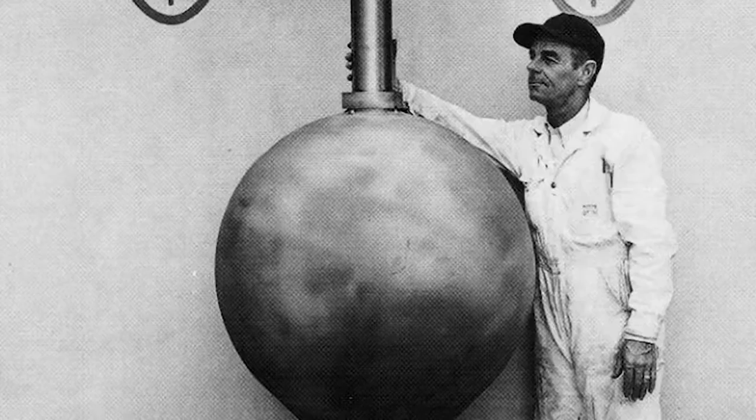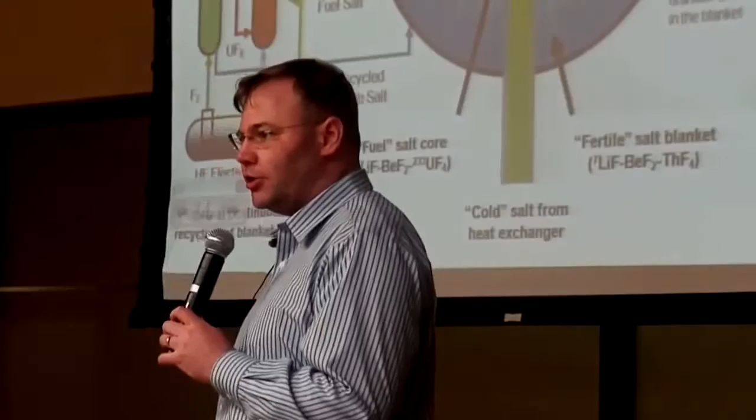You know, the Navy had reactors, and so the Air Force had to have reactors. Very, very radical nuclear reactors, totally different than the kind of stuff we have now, based on the idea that you could take salts and that they would be a really good medium in which to have a nuclear reaction. Well, we were young chemical engineers at the time, and God smiles on young chemical engineers. They do things that in later years would be regarded as crazy.

It wasn't that I'd suddenly become converted to a belief in nuclear airplanes. That the purpose was unattainable, if not foolish, was not so important. A high-temperature reactor could be useful for other purposes, even if it never propelled an airplane.

This is an old facility. Look down before you walk. That's our biggest hazard here right now.

Oh my goodness. Yes, yes. I've modeled this shape neutronically. It is like a lead pencil, isn't it? Yeah, it is. Basically. Right.

We just returned from a trip to Oak Ridge National Laboratories, and one of the exciting things that the Baroness and I got to do was to tour the molten salt reactor experiment, which was one of these types of reactors that was built in the 1960s. It was an experiment that demonstrated many of the key technologies, although there are some that still remain to be demonstrated.

How long have you been here? I've been here since 1992. There are very few people in mid-career in nuclear energy right now because there's a huge trough. We have a large number of students coming back into it.

Well, the context has changed completely, hasn't it? It has. Yeah, when we went into nuclear energy, they said, "What are you, nuts? There's no future in that." And it really didn't matter. We say it's the true believers.

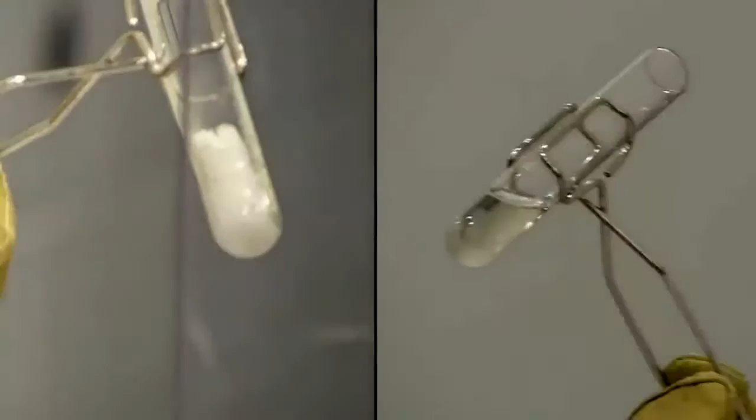Liquid salts are an outstanding heat transfer media. It really doesn't matter what you're going to be transferring heat for, whether this be a solar power tower, whether this be a salt-cooled reactor or a molten salt reactor. Viscosity on it is 30 times larger, but water's very low viscosity, so it's still a very low viscosity fluid. Some people might imagine this is quite a gloopy or kind of slow-moving liquid, but it's actually quite fluid. You're right, it does go through a melt much like a glass as opposed to water, which doesn't quite do that. So we want to run it 100 C or so above this, so it does flow nicely.

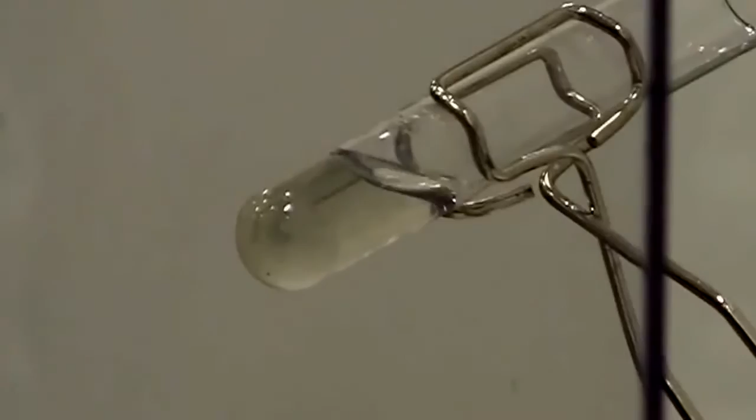If you go ahead and repeat doing things in here, you can see you start to etch the glass just a little bit. So what we have to do in a reactor is keep things very highly reducing. If you put extra beryllium in there, it essentially gives you a preferred spot to rust. And so this is all about controlling the potential corrosion of the salts within any vessel that you put it in.

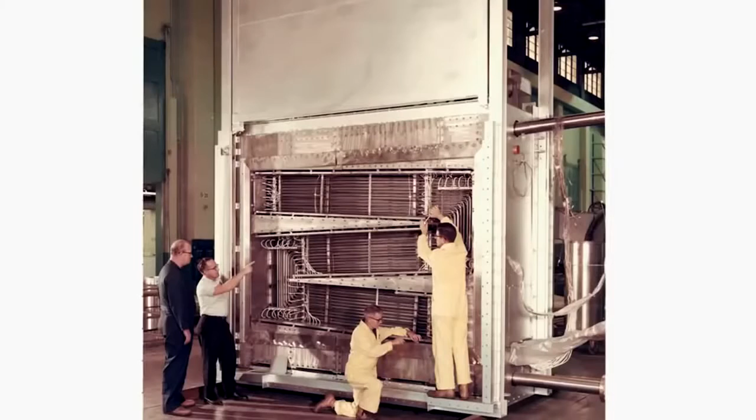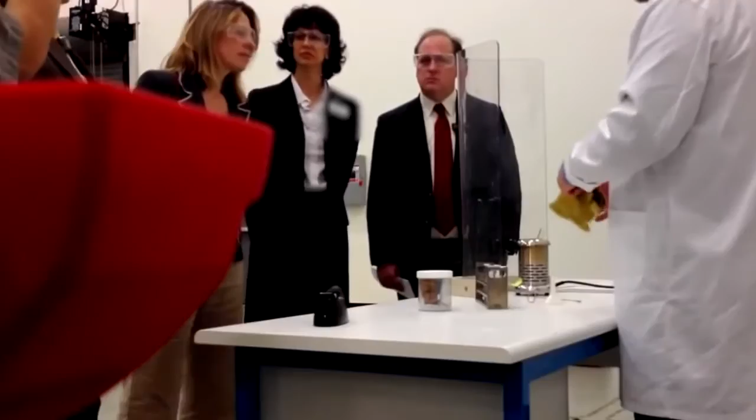The hazard with this is the same as with a deep fat fryer - if I trip, throwing hot oil, or hot salt in this case, on visitors would be considered a bad thing. But there's nothing else to it, it just makes a nice little clear liquid.

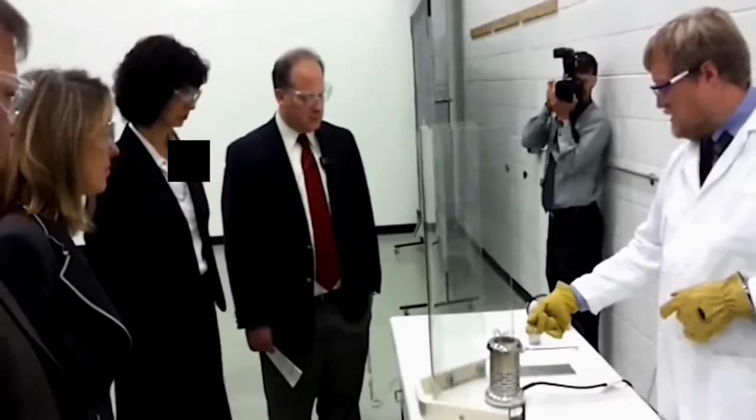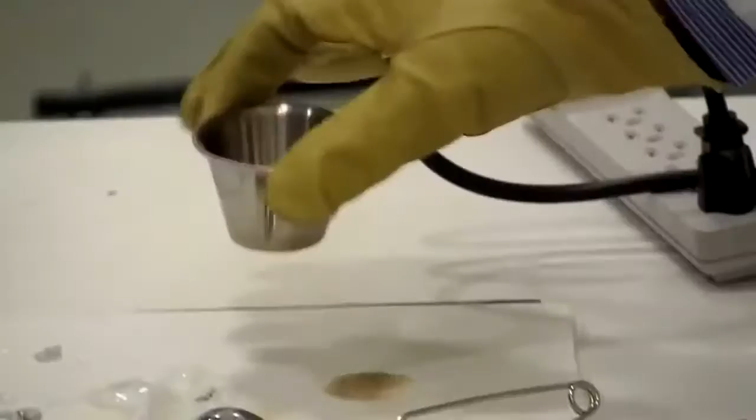I'll just pour this out into a little stainless steel crucible - you could hear that little snap there, that was a bit of moisture at the bottom of the stainless steel. At 450 degrees, this thing is a solid, so it doesn't take very long for it to form the solid again.

Isn't that a nice feature? If you had a little crack on this and it was starting to weep, it forms a plug - self-plugging. That's a nice thing, not being under pressure. On the other hand, if your design keeps the vessel hot, it'll stay liquid. That's why you have a guard vessel - if the absolute worst case happens and you have massive vessel rupture, you still catch it.

The Navy program that led to the light water reactors we have now was well optimized to the needs of the Navy, but it wasn't very well optimized to the needs of power production. The reason we have that as the base for our power reactor technology today is because the Navy was prepared to pay the first mover costs to make one work. Once you've done that, it's extraordinarily difficult to compete with it, because those first mover costs are very, very high and have no financial return associated with them.

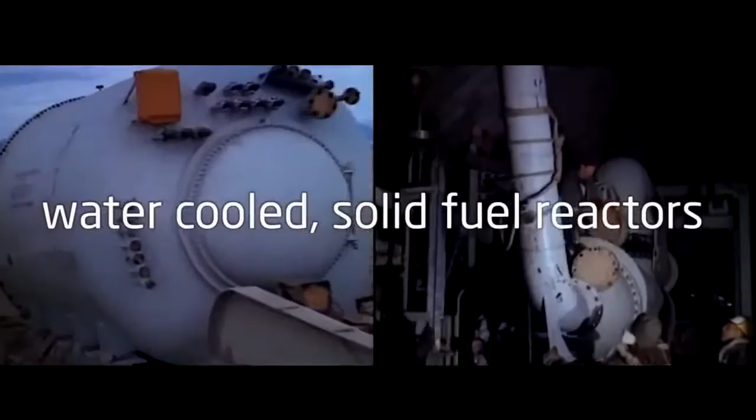The Navy has built their nuclear submarines, and the Army has taken the same technology as the Navy, the water-cooled reactor, and they're doing their thing. But the Air Force wants to build a nuclear-powered bomber. Now, Weinberg was a practical man, and he said a nuclear-powered bomber is probably a really, really, really dumb idea.

The dirty little secret was that most of the people involved in it knew from the get-go that it really wasn't practical. In contrast to a submarine, where you've got limited space but can shield it for the people on board, it's much harder on an airplane because of the weight. Most of us did not really think the aircraft reactor could really work, but we did feel there was a very interesting technology there that someday could be applied. And I would maintain that Weinberg was absolutely right in his assessment of the situation back then.

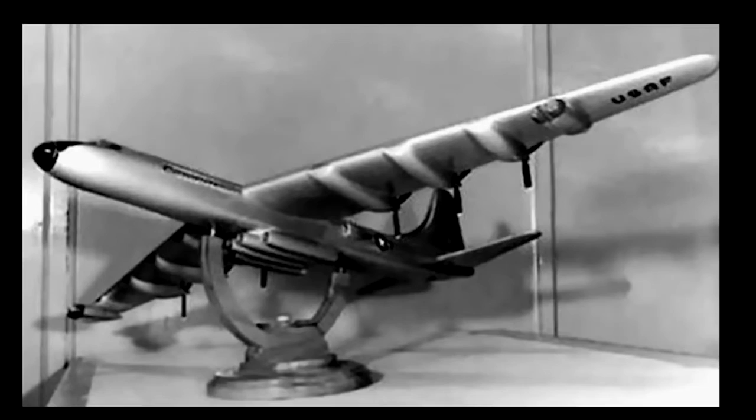He knew that to make the nuclear airplane work, they couldn't use water-cooled reactors. They couldn't use high-pressure reactors. They couldn't use complicated solid-fuel reactors. They had to have something that was so slick, so safe, so simple, that operated at low pressure, high temperatures, had all the features you wanted in it. They didn't even know what it was.

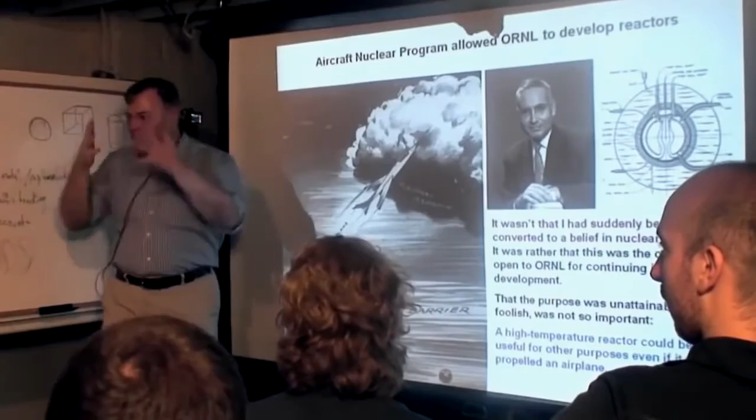I think someday this will be looked at as one of the great pivot points of history - that if this nuclear airplane program had not been established, the molten salt reactor would have never been invented, because it is simply too radical, too different, too completely out of the ball field of everything else for it to be arrived at through an evolutionary development. It had to be forced into existence by requirements that were so difficult to achieve.

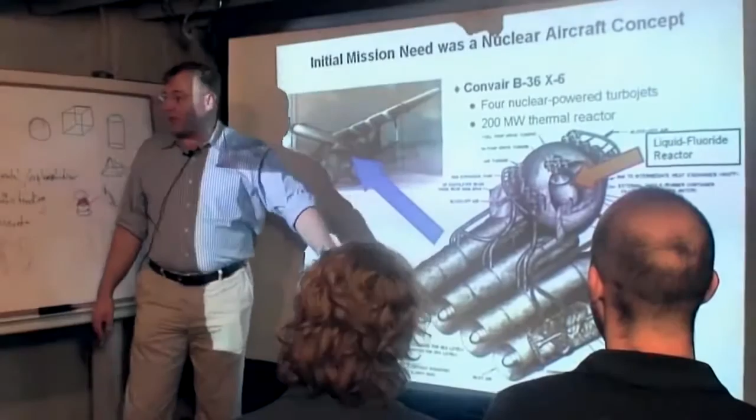And the nuclear airplane was that. So they began working on this high-temperature reactor. Remember, this was invented before we had ICBMs or anything like this - this was a doomsday weapon. I mean, if you're flying this thing to Russia, it's the end of the world.

I suppose you'd have to say it was a miracle that the homogeneous reactors operated at all, rather than that they operated well. Chemical stability of the system was not really sufficient - it was chemically unstable. The second reactor actually operated very well. That was the molten salt reactor experiment.

There it is. This is the place. These things right over here are the spent probes. Those things would extend to like 60 feet in length. They went down the tank, did the melting, did this bubbling and stirring and everything.

A lot of them started above the high bay. When you say high bay - it's taller and we can put cranes in because we can lift things up. You had to go down an additional 25 to get to the top of the tanks, then you had to go inside the tanks.

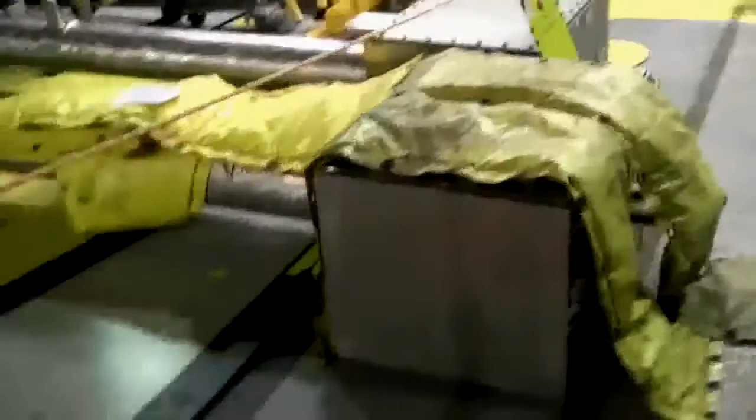So those things would extend. You got a pipe within a pipe. The box is the top part of the probe. We had the controls, we could tell exactly how far down the probe was moving and the weight of it. The probe had heaters on the end of it, and it would melt a pool in that salt and sink down in it.

All those long-handled tools they had for operations, it was almost heroic actions when they were trying to do things. You've got this length of distance, and we'd certainly try to design things today that could be robotically handled. It just would not be designed the same way as it was at that point.

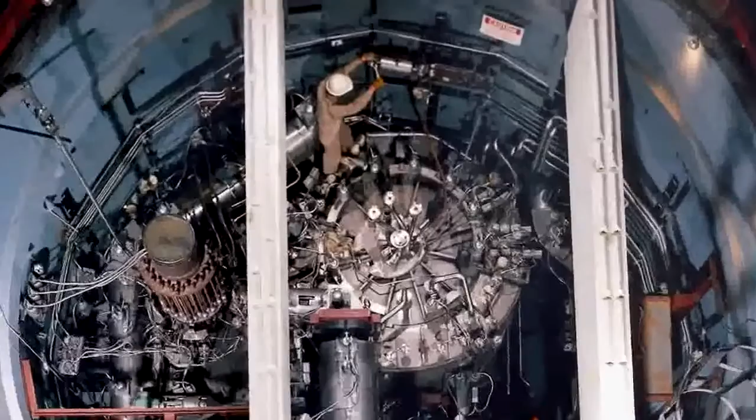One of the things I've learned from talking to some of the old timers at Oak Ridge, these guys are in their 80s now, if they're even alive, is that people didn't disbelieve that we could build the machine. They didn't believe that we could maintain it.

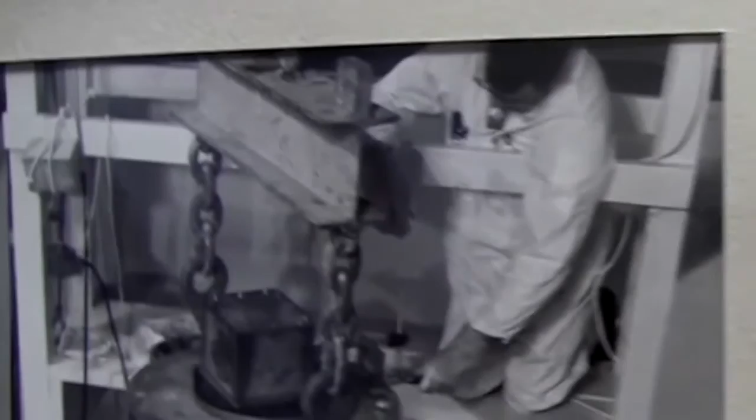Operation of the MSRE was not too difficult, and the people that I had working for me, they all had hound dogs under the porch, old cars out in the yard that didn't run very well. If anything came up with the molten salt reactor, they'd say, hey, we'll fix that. How you gonna do it? I don't know, but we'll fix it.

And they did. One time, the sample capsule was down in the pump. The flexible steel cable got tangled up, it got bad news—here's the end of that cable cut off. So I said, what are we going to do?

And there's the good old boys for you—they said, isn't there such a thing as fiber optics? There's the capsule, and they fished that capsule out. We were back in business.

And they had a lot of long-handled tools, remote cameras. It was challenging, but despite the challenge of operating in high radiation fields, they were able to operate and maintain that machine over the course of its lifetime.

We worked for several years on an experiment that proved that you can handle this molten salt reliably, and when things go wrong, we were able to fix them. The advantages outweigh the difficulties, and the concept is ultimately going to be a practical application.

We still have a few folks who are even operators here who are around. Syd Ball's office is just literally three over from me. He was at the controls when it reached its highest power there. He told me that was an accident. It sure was. Yeah, there's another way to tell that story too.

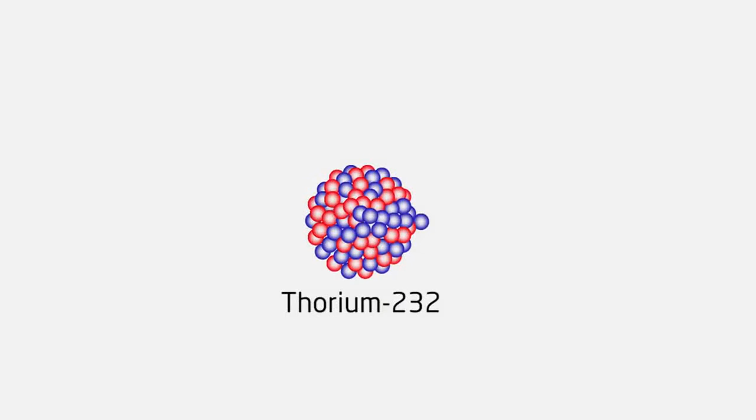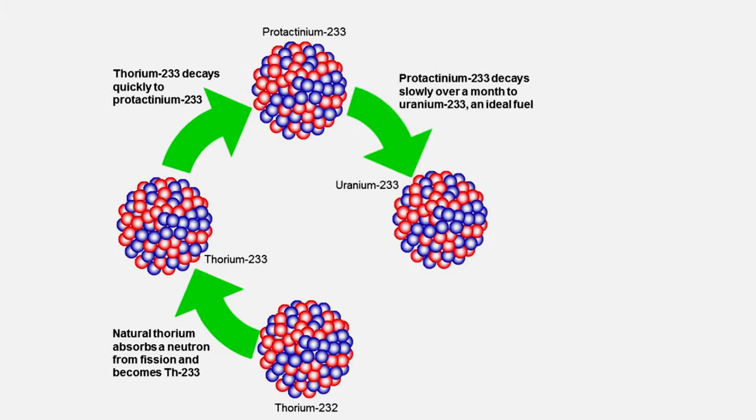The basic idea is thorium all by itself is not going to release nuclear energy. But if you hit thorium with a neutron, the thorium will absorb the neutron and it will turn from thorium-232 into thorium-233. It's going to decay into protactinium-233, and then it will decay over about a month to uranium-233. Uranium-233, if you hit it with a neutron, it will fission. In addition to releasing all that energy, it will release 2 or 3 additional neutrons.

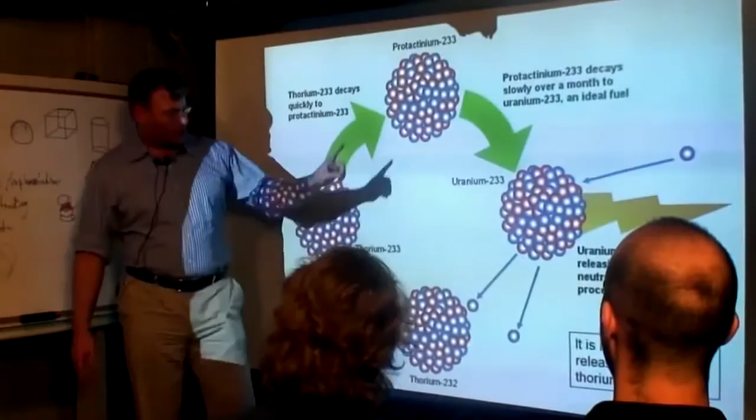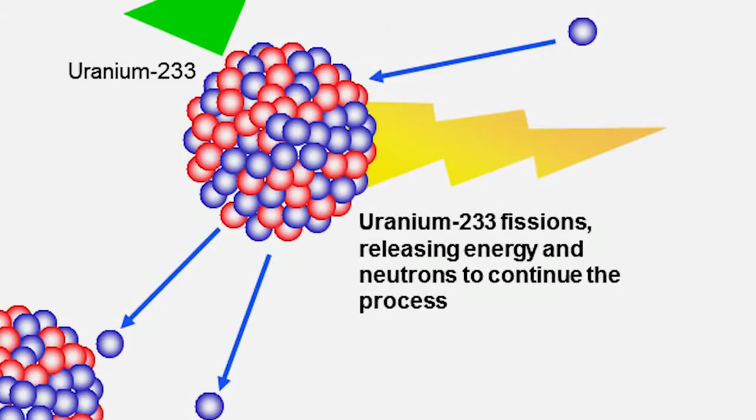So you need one of those neutrons to go find another thorium, and you need another one of those neutrons to find another uranium-233 to continue the reaction. You're fissioning uranium-233, but you're making a new one. You can almost think about it as a pseudo-catalyst. If you had some uranium-233, you could catalyze the burning of thorium indefinitely.

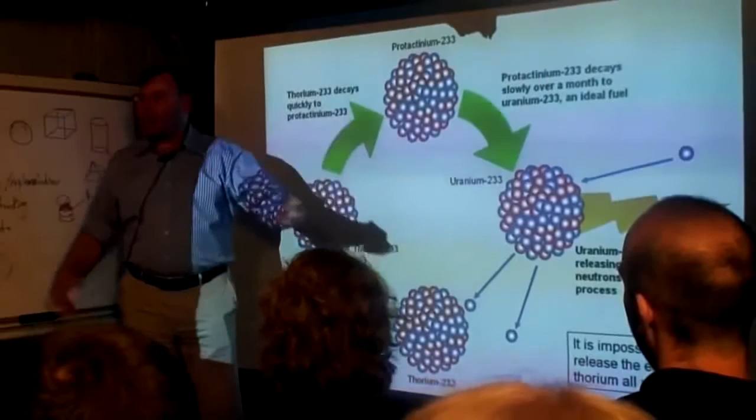So through this process, you can essentially implement that very simple thorium cycle, and this is what Weinberg and his team were working on in the 1960s. The molten salt reactor experiment was the core.

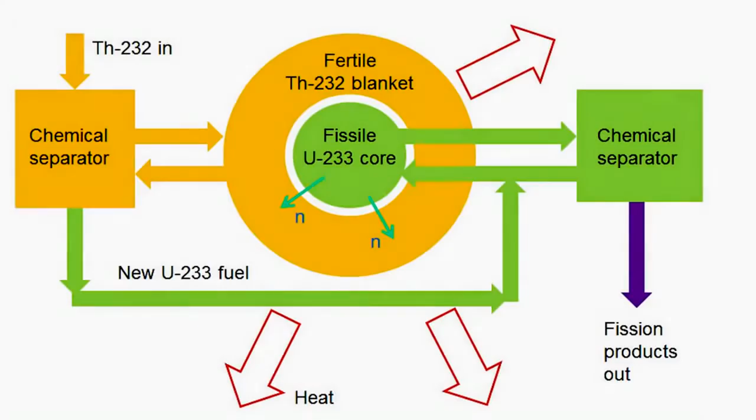After they completed the molten salt reactor experiment, they went to the Atomic Energy Commission. They said, hey, can we have some more money? We'd like to go now and build the real thing. We'd like to build the blanket, and we'd like to hook a power conversion system on and make electricity. They felt like they'd shot the moon.

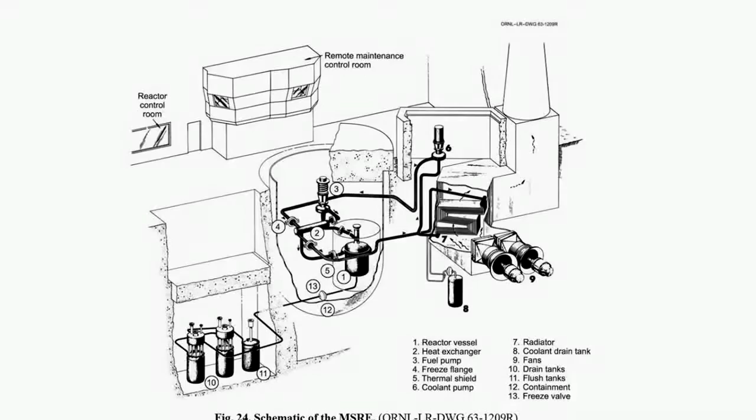Well, the Atomic Energy Commission, unfortunately, did not share their zeal to continue with the technology. Milton Shaw, who was the head of reactor development in Washington, called up Alvin Weinberg and said, stop that MSRE reactor experiment, fire everybody, tell them to clear out their desk and go home, and send me the money for fast breeders. Milton Shaw was sold on the sodium-cooled fast breeder reactors, and I am not familiar with why that was.

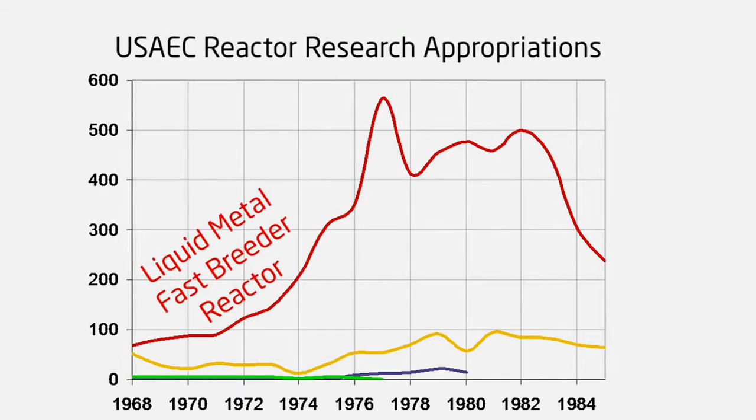The red line shows the expenditures on the liquid metal fast breeder reactor. This graph only begins in 1968. At that point, the United States had already built several liquid metal fast breeder reactors. It's very hard to see the green line for the molten salt reactor technology. It's extremely low. And then ultimately it was canceled.

We were competing with the fast breeder people at Argonne mainly. They just had more political sway than the molten salt reactor.

The problem with the MSRs is that they've never done it. They had one at Oak Ridge for a little while. Yeah, they went through and did a couple of little tests.

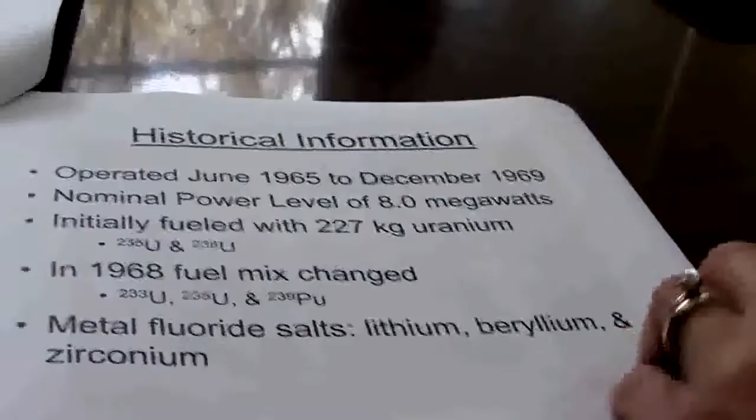We realized that we were minor league money-wise compared to the other programs. U-233 was tested here, and there was a little bit of U-235 in it, and they added some plutonium-239 in that fuel mix. Do you know how much plutonium was added? Oh, about 600-700 grams. They thought the U-233 was the utopia of uranium fuel.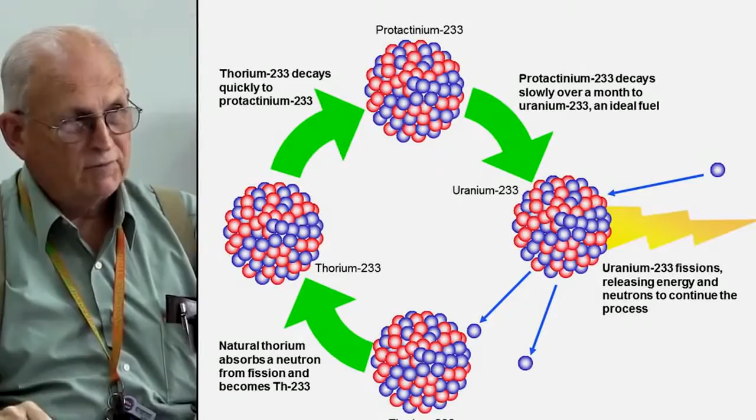Do you feel like the program had a sound technical basis, or do you feel like technical problems were the basis for cancellation? Some of the technical reasoning I heard for the cancellation was that there was a corrosion problem. Tritium was raised as another issue. We made no effort on MSRE to do anything with tritium, and there was a perception that managing tritium was going to be a very difficult, if not insurmountable, issue.

This is the WASH 1222 report from the AEC. Did the people on the program feel like tritium was an insurmountable problem? We recognized that tritium would have to be captured and sequestered for the system to be viable, but most people thought that's something we should be able to do.

Did the people on the program, particularly the chemists or material scientists, feel that corrosion was an insurmountable problem? No. In some of the subsequent work, after that initial shutdown, they did experimental work that seemed to bode very favorably for an ability to solve that issue—as well as the tritium issue, because we did tritium experiments in the 1974 to 76 period, and those are documented.

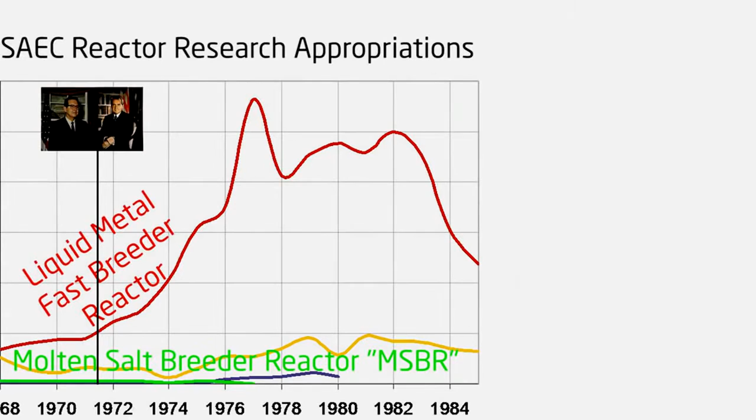You do that? Nixon was from California, Hosmer was from Southern California. Chet Holifield, who ran the Joint Committee on Atomic Energy, was also from California. It doesn't lead me to believe that the president was seriously considering alternatives to the fast breeder reactor and other paths that could be taken.

It was a focus on what can we do right now to get jobs. The United States is going to go forward in building a breeder reactor.

Now, don't ask me what a breeder reactor is. All of this business about breeder reactors and nuclear energy and the stuff is over my head. That was one of my poorest subjects, science, and I got through it, but I had to work too hard.

I gave it up when I was about a sophomore. Nixon, by his own admission, was not particularly well versed in the different types of breeder reactors. Unless you're one of those PhDs, you won't understand it either.

But what I do know is this, that here we have the potentiality of a whole new breakthrough in the development of power for peace.

Maybe it might have benefited our country a little more if Nixon had been able to ascertain the different values of different types of breeder reactors and why one might have an advantage over another. Representative Craig Hosmer, who was the fellow on the phone call we heard earlier, said that if cost targets were missed, 'I, for one, don't intend to scream and holler about it.' So it's not hard to see that they could see great economic benefits accruing to their area of the country.

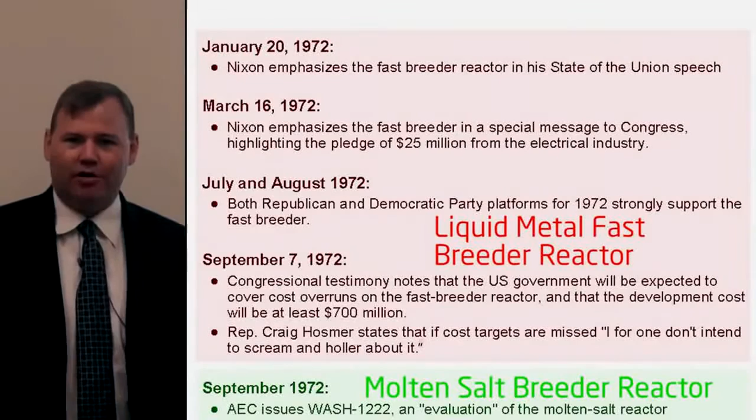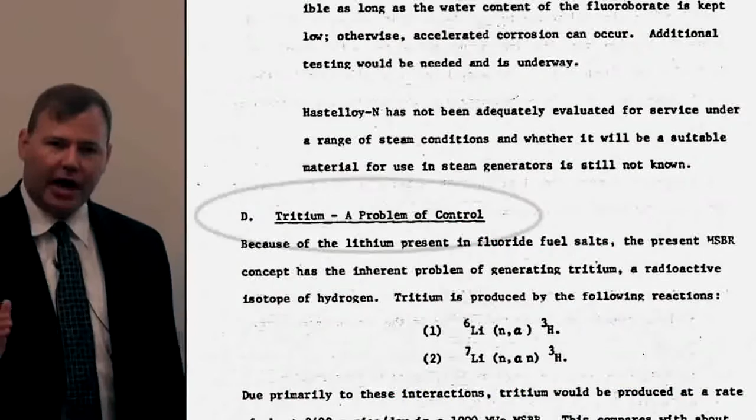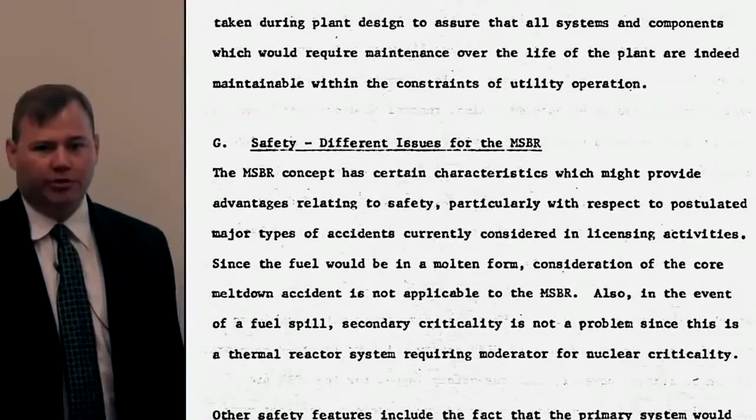In that same month, the Atomic Energy Commission issued WASH 1222, an evaluation of Weinberg's molten salt reactor. It was highly critical of several technological issues encountered during the development of that idea. More importantly, it almost completely ignored the safety and economic improvements possible through the use of the molten salt reactor technology. This was the main focus of Oak Ridge for decades, and it was very abruptly cut off—a very bitter pill to swallow for them. So a lot of these great minds thought their life's work had kind of gone to waste.

The original shutdown came early in 1973 with a letter from Mr. Shaw that says, 'Thou shalt stop right now.' One anecdote I heard: he said, put your hand on your desk, take everything that has to do with molten salt, sweep it off, and you're finished. I saved all my documents.

So you had this geographically isolated place with a huge body of concentrated molten salt knowledge that never got out. We had a corpus of people in Oak Ridge who knew how to do this in the mid-1970s. They're literally dead and gone now.

People that worked on the molten salt reactor would come back and then get shut back down. A lot of people got burned out from that pattern. I've met a handful of them. They're in their 80s. They're not going to do this anymore.

What's happened to Paul Haubenreich and Beecher Briggs and those guys? Have you kept track of them, do you know? Well, Beecher's been dead for a long time. How about Paul? I have not had any contact with him, so I don't know. Quite a few of them are dead now. Well, that's true too, yeah.

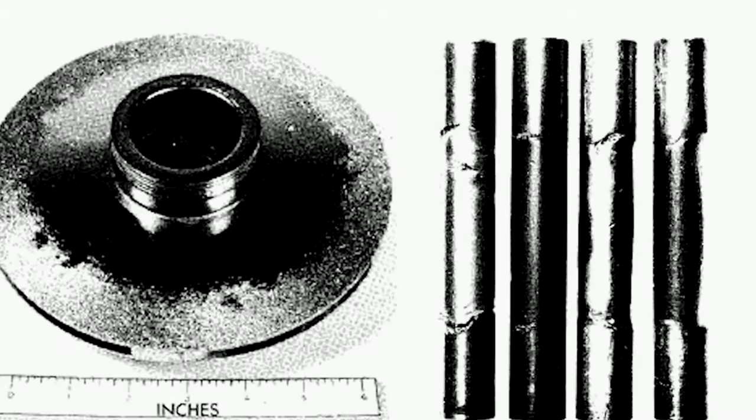He said it probably set us back a decade on some of our ability to roll out quick changes to our recipes. Oak Ridge made a lot of these salt loops—basically little circular loops of plumbing pipe where they would circulate this hot molten salt to see if it corroded the piping. And then they would run these things for 20 and more thousand hours of operation. They were valuable artifacts of the molten salt age.

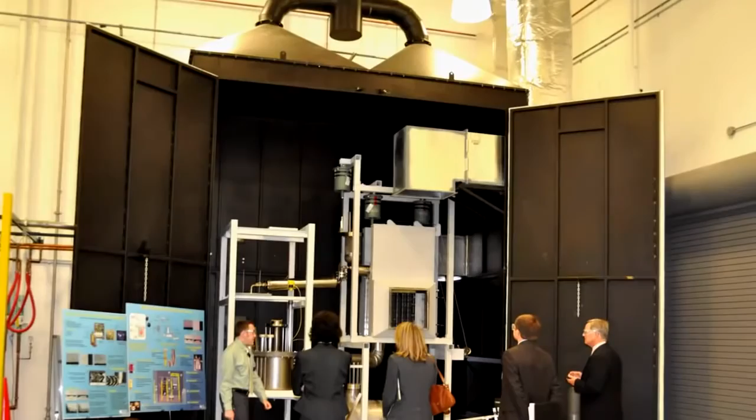Well, Oak Ridge was throwing them away, and Uri Gat was like, no, we need these if and when we restart molten salt. We are trying to demonstrate some of the core technologies you have to make liquid salts a standard heat transfer material. The idea of this loop is to retain our expertise in using high temperature salts, to provide a platform for us to test different components, different reactor concepts.

Above about 600 C, it becomes technologically very difficult to transfer heat effectively. The loop is designed to run at 700 Celsius, that's about 1300 degrees Fahrenheit, and the whole loop is made out of Inconel 600.

Ideally for salts, you'd use an alloy like Hastelloy-N. Right now you can't really get the right components in the right shapes using Hastelloy-N, so we use Inconel 600. It's maybe not the best option, but it's the economical and available one.

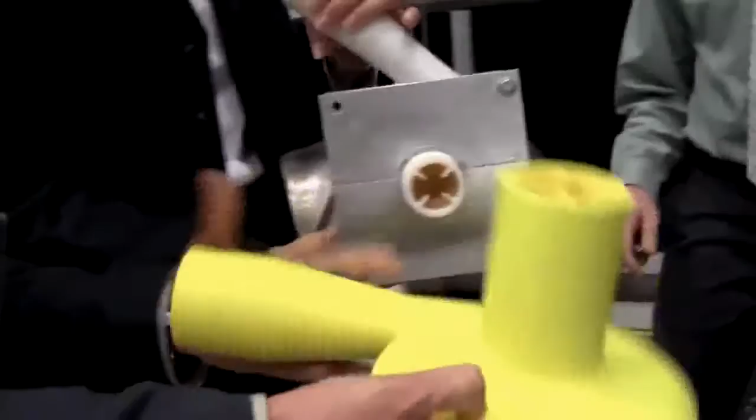It's a way to control liquid flow without using a valve. In normal operation, it comes in this side and out this side, and that creates a lot of resistance - it spins around and comes out. During an accident, the flow reverses and goes this way, and there's not a lot of resistance going from here, just flowing out, because it doesn't spin around.

Then there's a heat exchanger - that's another part of the test. Is all the heat localized on the pipes, or do you heat the whole box? All the heating is in the pipes, either inside the pipes or on the outside of them. It's trace heated - you can see coils of heating tape. All the pipes will be insulated with about 4 inches of insulation.

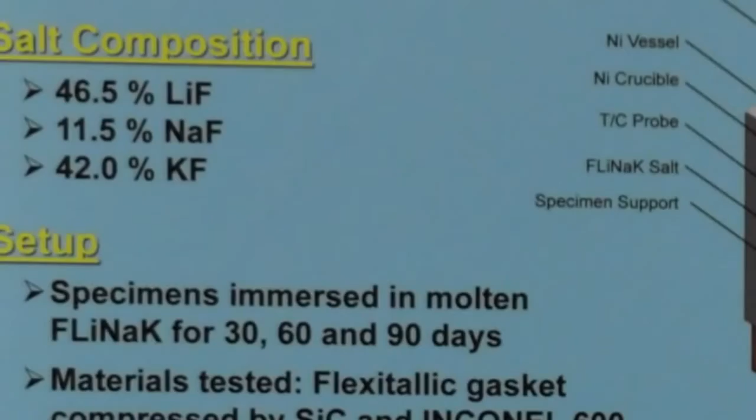There'll be a crucible here. That's where we'll initially load the salt, pass hydrogen fluoride and hydrogen through it, and that will clean out the oxides and different contaminants inside the salt. Once the salt's clean, we'll pump it into the storage tank, where the salt is allowed to freeze inside of it. That's an issue with salts - you can't have it just freezing inside of pipes, because it expands and breaks.

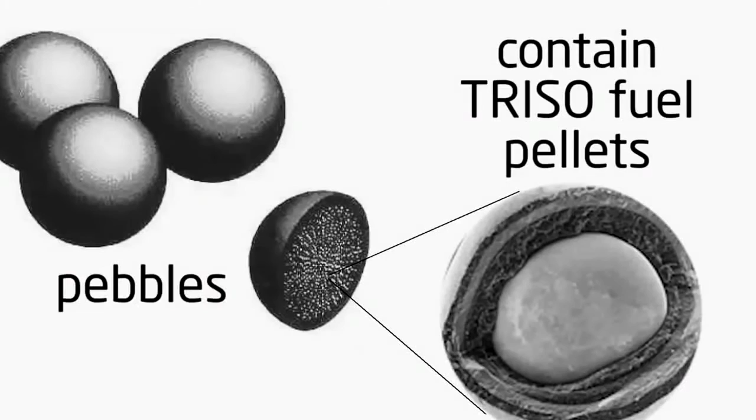The idea is we're testing a reactor concept where the fuel would be inside these pebbles. We'll fill it up about this much - 600 spheres will be inside of it - and that's where the fission and the heat's created, with flowing FLiBe over it.

Can I ask what the theory was around using a solid fuel pebble in the FLiBe rather than dissolving the actinide into the salts? Currently in this country, we're not really looking at molten salt fueled systems.

Using a molten salt as a so-called working fluid, it's doing the job of transferring heat from one place to another. Molten salts have what's called a heat capacity - the ability to hold on to heat. They're great at it. In the example of your car, you want to move the heat away from your engine as efficiently as possible and then just disperse that heat.

The boiling point of water is only 100 Celsius - 212 Fahrenheit. Don't ever open your radiator. Why? Because it's under enormous pressure.

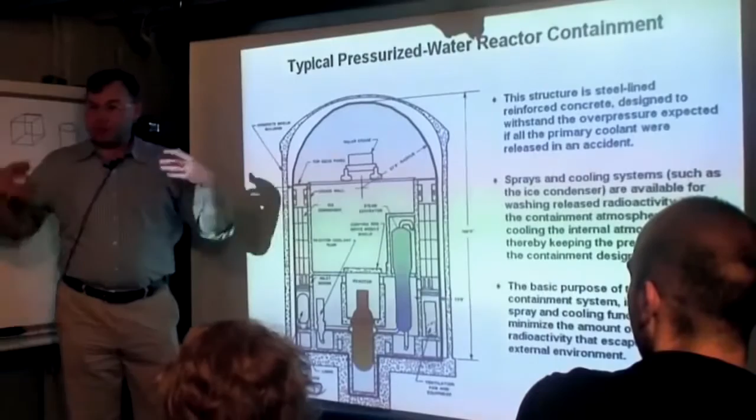This building is the size it is, and it's the way it is, precisely to accommodate this event. They've designed this reactor so if this happens, all the steam is captured in this building and doesn't get out. It's much, much bigger than the reactor, and that's all driven by that 1,000 to 1 difference in density between steam and liquid water.

The boiling point of a molten salt, however, could be 1,000 Fahrenheit, could be 1,500 Fahrenheit, depending on the type of molten salt. They do it at 1 atmosphere of pressure.

Revisiting the potential coolants, water is the one most commonly used. It operates at relatively low temperatures and very high pressures - that's exactly what we don't want. We want to operate at low pressures and high temperatures in order to achieve high thermal efficiency. Gas can operate at high temperatures, but it has to go to high pressure. Only the salts appear to offer the potential to go to high temperatures at low pressures, and that's a unique combination.

Using a molten salt as a working fluid to move heat around is excellent, because in that case you want as much of that heat as possible. Now, fluoride salts can also contain nuclear fuels like thorium and uranium, and that eliminates a major cost of what we do today in nuclear, which is fabricating nuclear fuels.

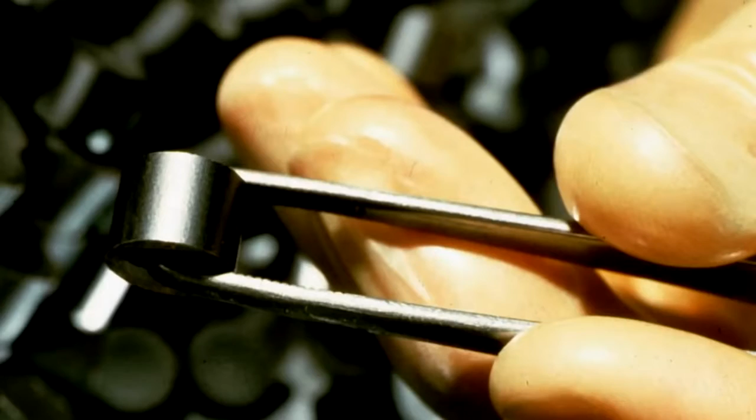Let me talk about today's nuclear fuel. They take these fuel pellets and slide them down these zirconium tubes, segregating the pellets along the length of the fuel assembly according to enrichment. They'll put the most enriched ones in the middle, and then decrease the enrichment along the length of the fuel assemblies.

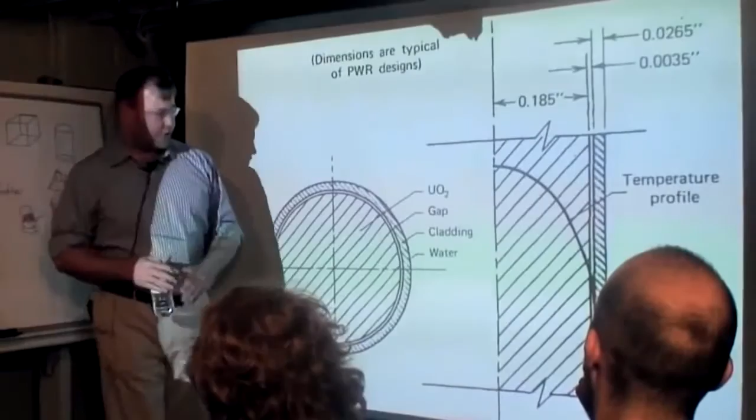It's a ceramic, a lot like the stuff your coffee cups or cooking ware is made out of. Great at going to high temperature, but not thermally conductive, so it gets very hot along the center line of the fuel. This stuff has about the cross-section of a pencil, but between the center and the edge there will be like 1,000 degrees of temperature difference. That puts enormous thermal stress on the material itself.

You can't even come close to 100% burn, not even approaching it. If it gets too damaged, it's going to breach the cladding and let some of its fission products out, so you get very, very poor fuel utilization. If you remember when you went camping and built a fire, it burns hottest in the middle, and the stuff on the edge isn't getting burned very good.

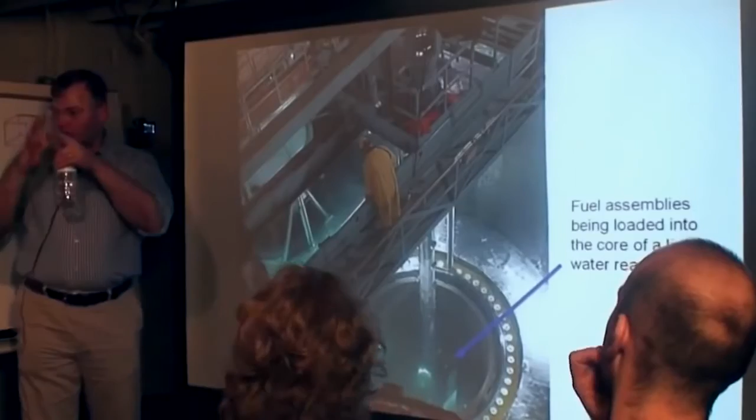They'll load in about a third new fresh fuel, and then they'll reshuffle the fuel that's already been in there, moving it from the center out to the periphery. All their money now is coming off fuel supply contracts. That's how GE and Westinghouse make money on nuclear power today. They don't build reactors, they sell fuel.

There must be some advantages to doing the solid fuel. If you want to use the salt as a coolant, it's just much, much easier to do something that's non-radioactive on this. That's why we have the walk before you fly approach.

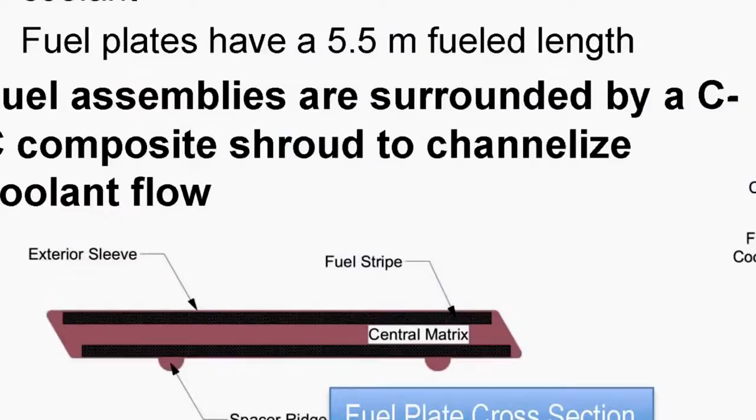The U.S. is electing to go after a salt-cooled reactor at first. Our method of rejecting heat is into the coolant. What we have are planks, about 25 millimeters thick. You can put whatever kind of test you can imagine in this area. We could put a solid plated fuel in. That test section can be replaced and others can be put in.

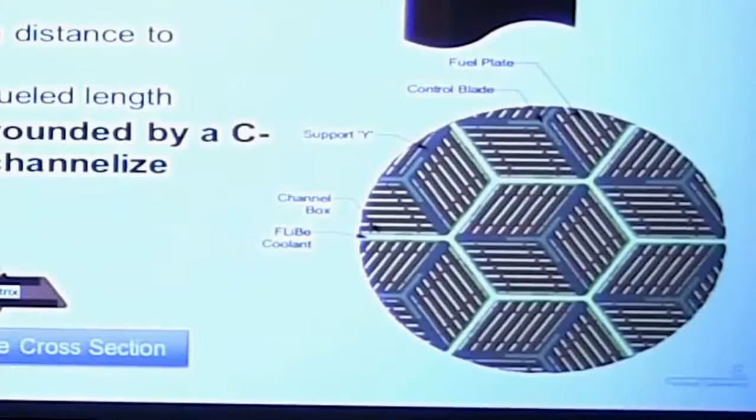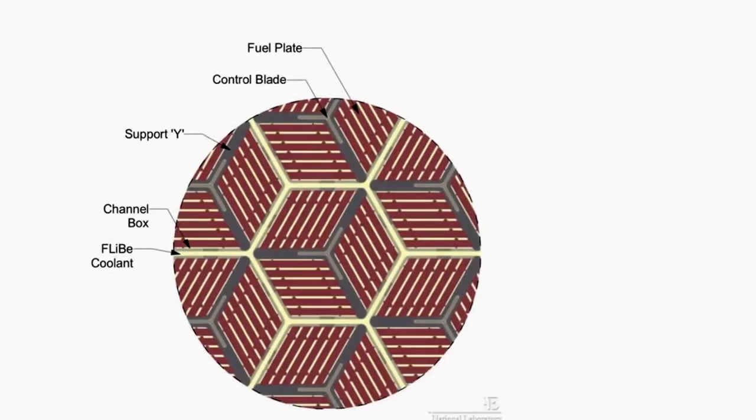So if you're looking down from the top, there are 18 fuel assemblies arranged in a hexagonal grid. In a solid system, you can't get into the bulk of the solid fuel. In a liquid system, you effectively have infinite surface area.

It is not to say that the U.S. doesn't recognize that molten salt reactors have some very interesting, advantageous capabilities, but they are a more technically challenging thing to do. What is easier? Running a liquid past a solid in order to transfer the heat, or having the fuel be a liquid and use that in and of itself? So I would argue that actually combining the two is easier.

Sure, it's more chemistry, but so what? I'm a chemist. There are lots and lots of chemists on the planet, and a lot of them are a hell of a lot smarter than I am. So, go solve the problem.

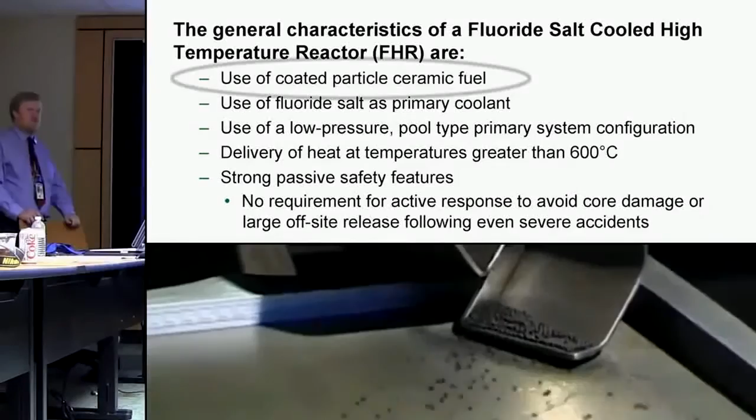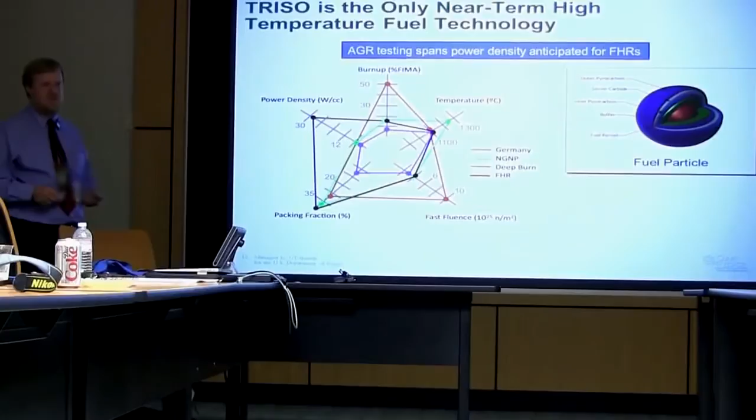It uses a fluoride salt as a primary coolant. It uses coated particle ceramic fuel, that's the TRISO fuel. This is the TRISO. Essentially these are small kernels, smaller than a millimeter. We've got the fuel in the middle, and a multi-layer structure, the important thing being the silicon carbide in here, which is actually a gas-tight containment. Silicon carbide, even though we're using that as part of the design...

That's part of the test. We're going to find out how that performs in a salt environment now. We'll be doing natural circulation, safety testing, corrosion specimens in here in a pumped loop. I figure the next decade we will continue to use this as a base for our system.

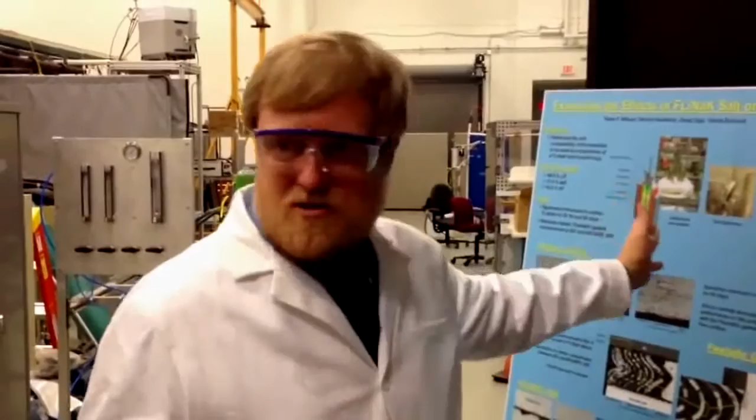And you just happen to hit the timing such that the induction power supply is out being serviced, and the pump is out being serviced here. We're expecting by the end of September to have the loop pretty well ready to heat up.

They're not doing neutronic stand-ins the way China is. So what's the freaking holdup? They got the last guy in the world who knows how to make these different kinds of salts. We're not asking for our national lab to do miracles. We're asking them to basically replicate something they did in 1952, probably. Things went very fast in the 40s and 50s, not only because of the regulatory environment, but also because they were not developing commercial nuclear power.

They're developing it, just get a reactor up, show that it works, do experiments. Nuclear technology is well beyond that now. It's commercial production technology, so you have to do things differently than we did back then. If you wanted to just do an experiment, yes, we could compress the scale and have something running at very short periods of time, but that's not what we're looking for now. We're looking to be a preferred source of energy for the nation, and that takes more time.

Back when they were developing the molten salt reactor, they had numerous loops that were not fueled. These range from natural circulation test loops, to material testing, to pump systems like this. Most of the technologies for a molten salt reactor, as far as thermal hydraulics, are identical. So they're all very relevant, yeah.

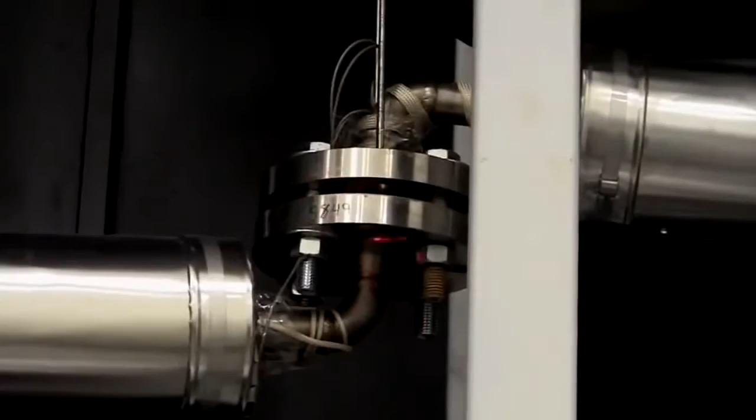There are a number of technologies that have never been done before in salt—that rotating flange up there with gasketed seals, the fact that we've got ceramic and metal pieces in a single loop. Tons of stuff you're doing with FHR is in common with what we're doing.

I can certainly see reasons for looking at thorium reactors as a follow-on, and the true molten salt reactor. You have your conventional solid fuel with a liquid coolant, a fixed fuel form with liquid flowing by it. Your pebble bed is a bit of a transition, in that the pebbles can percolate up through, so you get some movement of the fuel. Then your next step is a slurry, where you've got smaller particulate moving with the flow. And the final step is the fuel actually in solution. You can almost imagine a continuum, with the pebbles getting smaller until finally they're in solution. So each of these are steps towards a full solution—different reactor concepts.

That's what we're actually debating internally within the nuclear lab system. Do we want to build a prototype reactor that demonstrates some game-changing technology for nuclear? Yes, you do. But it's going to be a major national commitment when you're talking those types of numbers, and there's nowhere near that level of consensus that this is the right path forward. Without building that consensus, we're going to stay an interesting technology option forever. We will never go beyond that.

We're funded through literally thousands of projects that come down from DOE and other government agencies, where they say, we need you to go do this, we need you to go do that. There's no line in the federal budget that says Oak Ridge National Lab, $1.65 billion, go do good things.

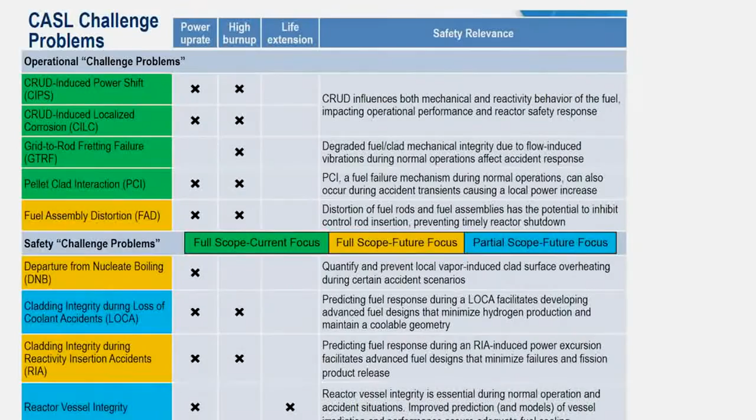We're focusing on pressurized water reactors, new fuels that are more tolerant and resistant to accident scenarios like loss of coolant and cladding integrity. Right, so you're modeling a physical system. So how do you know this is right?

Could you talk a little bit about the versatility of this with regards to other reactor types, particularly like MSRs? You've got to worry about a different type of coolant and different geometries, but you still have neutrons, you still have heat transfer, you still have structural mechanics and all that base technology.

In fact, DOE said you must select and model physical reactors, show that it's relevant to actual operating reactors, not a design that isn't operating yet. But in general, the simulation technology we're putting together, we expect it to be broadly applicable to a large class of reactors. This calculation here is looking at a fuel pellet that might have a chip in it.

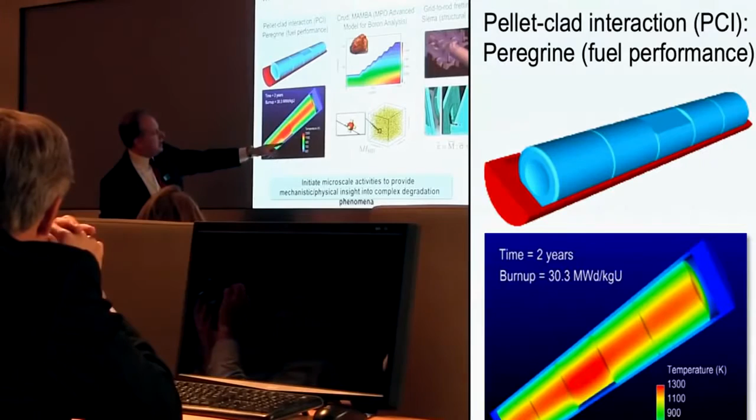What would happen is that you operate with a chip in a fuel pellet, what would happen to the cladding and the stress on the cladding. This actually shows what holds the fuel rod steady. If you get a gap in here, the rod can vibrate and wear a hole.

For the nuclear industry, for the most part, I think it's fair to say they're really not interested in novel concepts. They have problems today that they want some help with.

Some of the people that we were visiting with in Oak Ridge over the last few days were retirees who had actually worked on the molten salt reactor program. An issue that was repeatedly brought up was that it's a very, very different kind of machine than what the nuclear industry is used to. Suddenly here were these young people who were showing an interest in their technology that they obviously had a real fondness for.

There's now a whole bunch of people out on the internet that are following this, taking such an interest in their sort of pet project that they clearly loved. One of them said, 'Oh, everything I worked on got cancelled.' It's like, which they feel, perhaps that their secret had been overlooked. But I think we're hopefully resurrecting it just in time.

A filmmaker in Canada put out a request on Kickstarter, which is a way to raise funds over the internet, saying, 'I'd like to make a video. I've done everything up to this point for about $1,000. I'd like to get $20,000.' When we told those molten salt reactor retirees that 600 people had donated $40,000 on the internet to make a video about their work, I can't even tell you how excited they were.